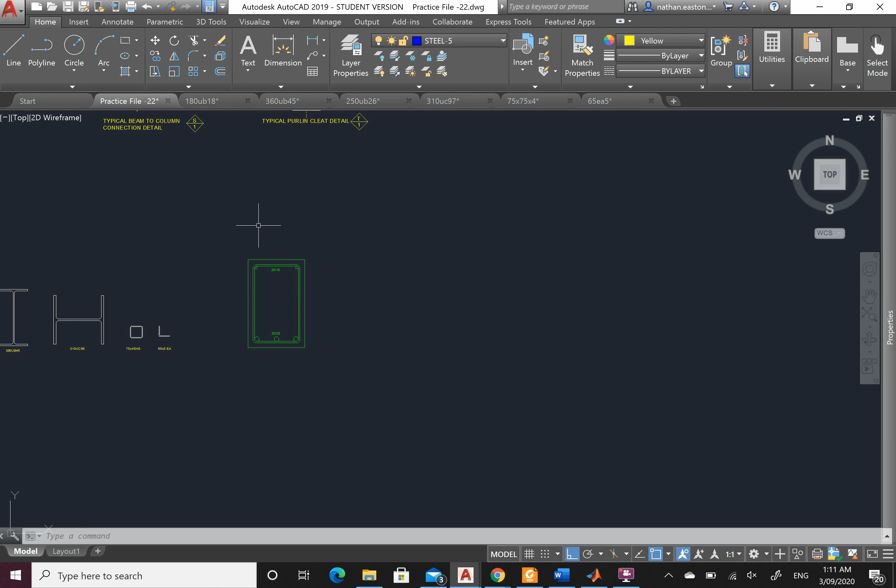So I've got this concrete beam. All I've done is taken off the measurements, and let's go through and draw it in. So let's change it to a layer of concrete. We've got concrete here, concrete 7, that will work.

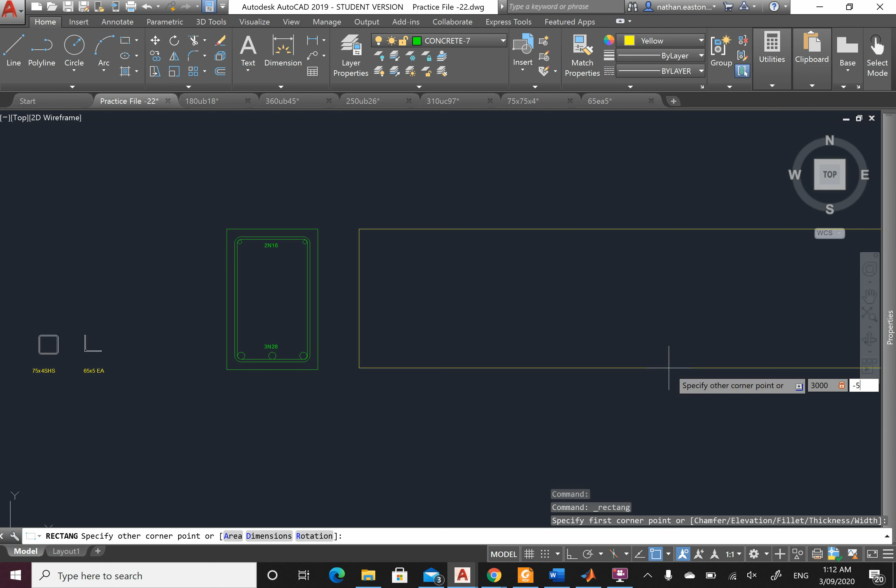So I know my beam, I'm going to say it's a 3 meter span, so 3000. And I know it's negative 550 deep. So negative to bring it down from the top, because we're dealing with X and Y coordinates. So what have I got? Well, I've got a 30 millimeter cover.

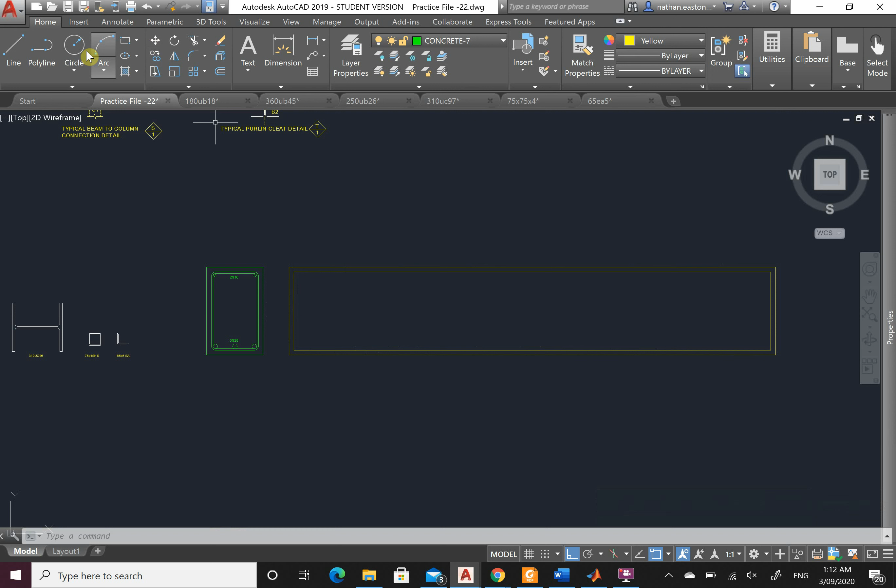So let's offset in by 30. Let's bring the beam inside. And these are my boundaries, basically. So really the outside is concrete, my steel is confined in between. So let's draw a line, one from here to here to start off with. Now this line, what have I got? Well, I've got the thickness of my ligature or my stirrup, and then I have 2 N16s up top.

So what we're drawing is how this beam looks from the side. Basically we're drawing in the steel cage that sits inside of it. It's the same principle for columns. So if I move this down by 10 millimeters, that's going to get me to the bottom of this ligature. If I move it down 26, I'm going to get down to the bottom of the bars, which is what I want. So let's move it down 26.

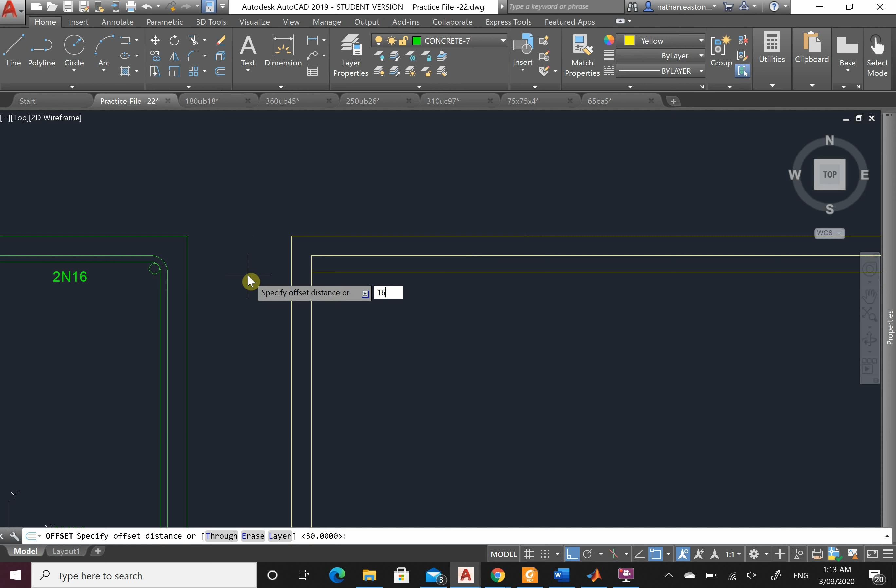And let's offset that back up by 16 for the diameter of the bars. So these lines through here are the bars, and our ligatures will run vertically up to this point. Looks like a lot of lines at the moment. It will make sense as we go. So same thing down the bottom, here to here.

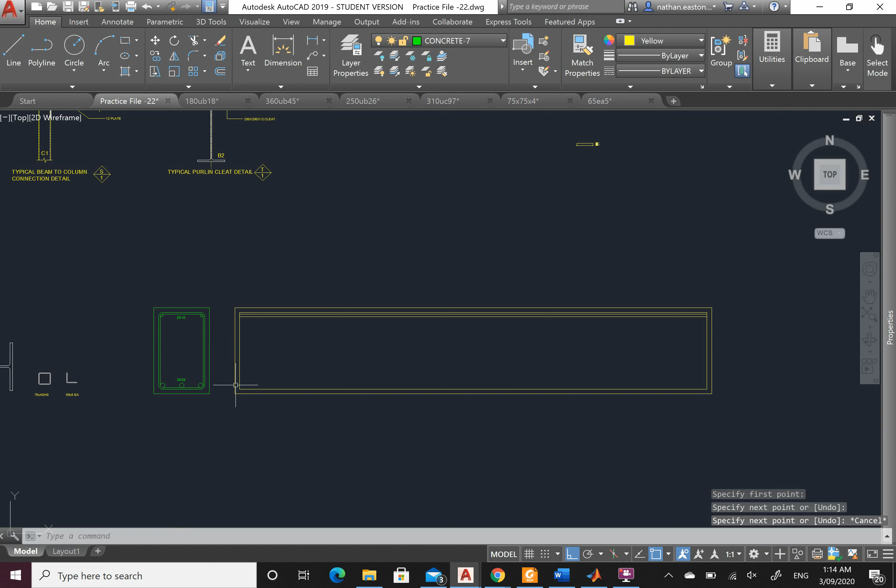Let's move this one up by 10. So moving up by 10 gets me to this line here. Now I have 28 to get me to the top of the bars. So let's copy this one up by 28 millimeters. And there we go. So what I'm going to do is I'm going to draw a line from here straight down. This is where our ligatures are going to start.

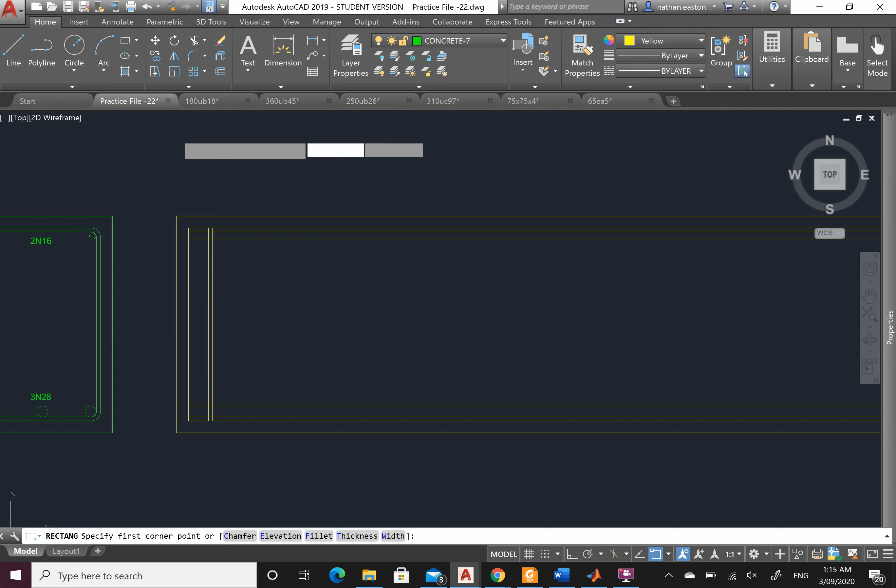Now they don't start at the end here. They start a little bit in. They might start 50 or 100 mil, probably not 100, maybe 75 mil in. So let's start this in by 50 to start off with, and I'll show you why at the end we might drag them all down a little bit. Offset by 10. So 10 mil is the thickness of the ligature. Now what I'm going to do is draw a rectangle around it, just to make my life easier when we go to hatch it.

So because I've now doubled up on lines, let's go through, select the ones. Remember, blue selects everything covered, green selects everything it touches. So everything in the blue, and we just delete that one, just so I'm not doubling up. Now I can delete this outside line. Don't need that anymore.

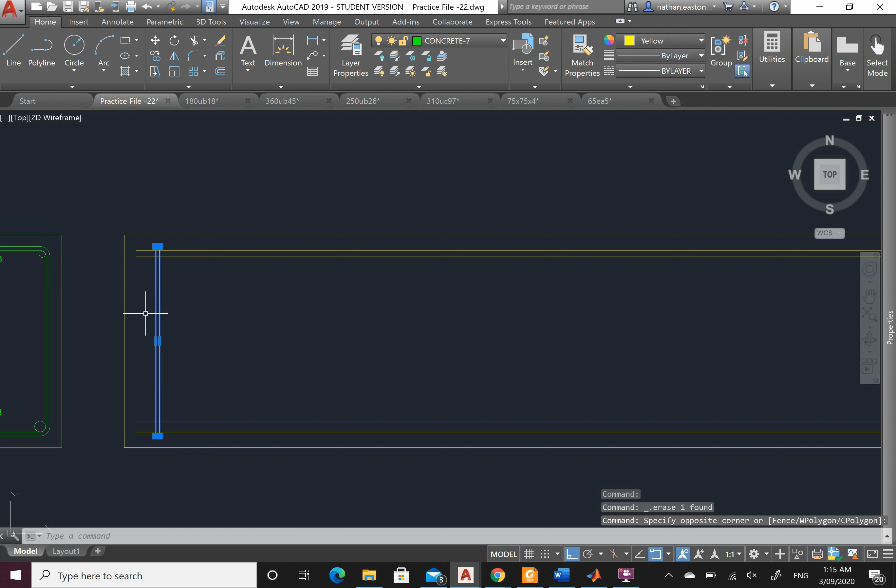Now these are going to be spaced at 300 centers. They might be more, they could be less. It's up to you as a designer. We design this for the shear capacity, so it all depends on the loads acting on the beams. So let's come through. We're going to space these, like I said, at 300.

So hopefully I can remember my times tables. Everybody sits there and laughs at me.

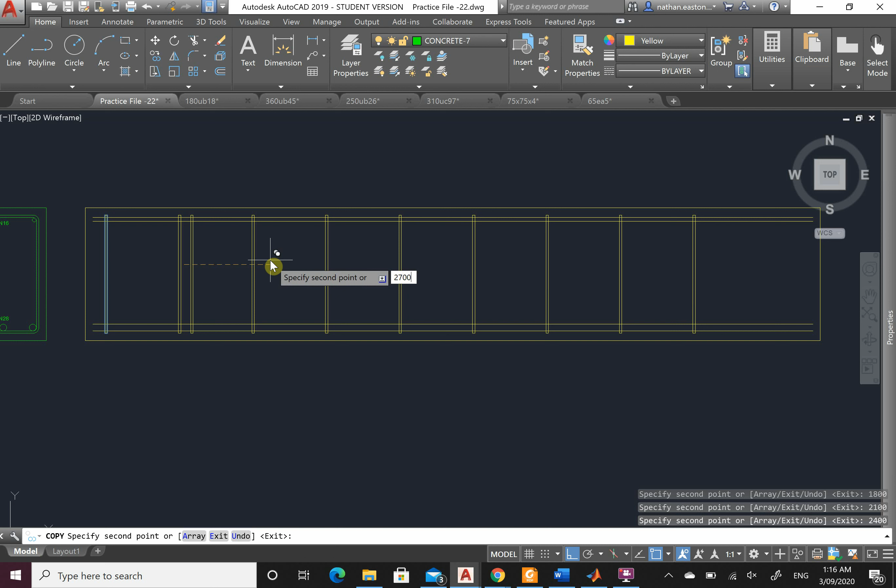So here we are, 1500, 1800, 2100, 2400, 2700, and 3 meters. Cool. So the one here at 3 meters is sitting way out of that beam, so I don't need that one. Delete. This gap here is probably a little bit too big. So what I might want to do is just select them all, and move them down by 75.

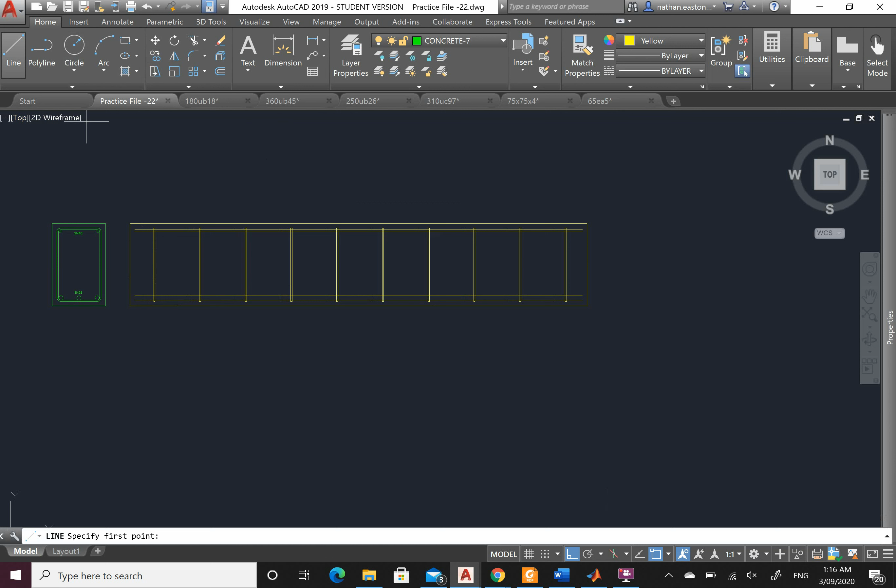So our spacings can be less than 300, they can't be greater. When you do your structural analysis, you'll read that in part of the concrete code, which says the spacing of these ligatures is a ratio. It's either 0.5 times the depth of the beam, 0.92 times the depth from the top to the center of the bars, or 300. So a lot of the time 300 is the governing factor. It's always the minimum of those three cases, but you'll learn that down the track. So for now, 300, and we're good to go.

Alright, so trim. Now if I look at this beam from the side, basically what I've got here is the cage. I can't see through its ligature, it's solid steel, it sits around the outside of it. So these ligatures, or stirrups, help for numerous things. What I'm doing now is just trimming through them, so I'll just talk while I trim, so everybody's not bored.

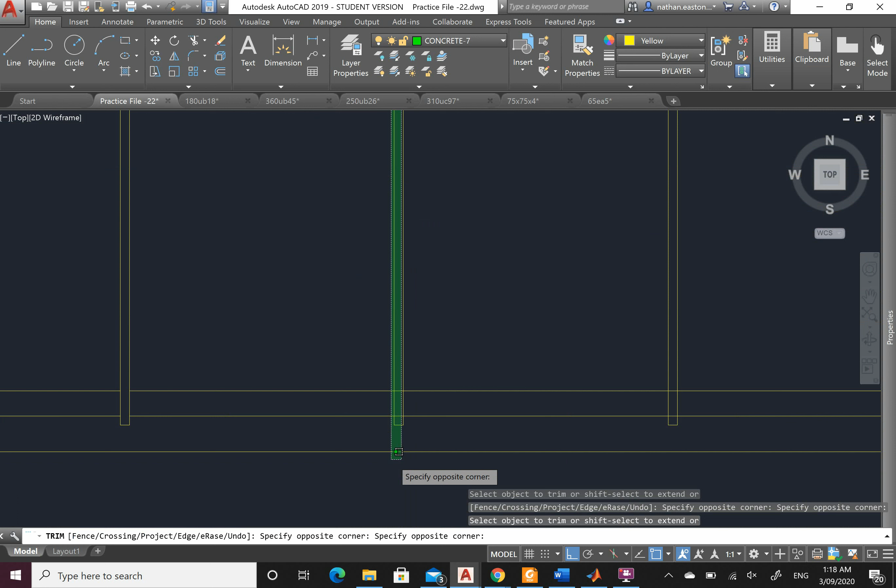What they do is they increase the shear capacity of our beam. On top of that, they also help to confine and hold our longitudinal reinforcement. This longitudinal reinforcement is quite slender, which means it's quite thin for how long it is. Because of that geometric property of the steel, we have to confine it somehow. So these ligatures effectively stop buckling occurring inside the concrete.

That's probably all absolute gibberish, but what it's doing is it's holding it in place, so when anything squishes against it, it stops it from doing this. So there's numerous different reasons why we put it in there, but they're the main ones. Awesome, so that's my little ramble. We finished trimming through these.

So what's next? Well, we've got our little, it kind of looks like a ladder. This is how our cage looks. If it was a column, basically you would just select it and rotate it up, and there's our concrete column. You have different ties, you'll tie them down in different ways, but it's the same principle.

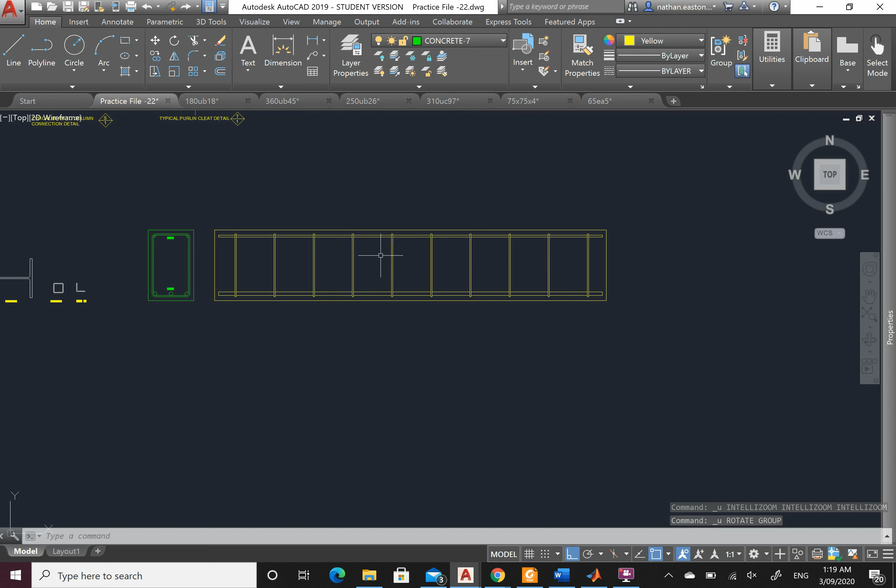So like I said, you'll need to know how to draw this for your analysis subject when you come to designing concrete. So let's come through and just do some hatching. We're not going to annotate it. I've shown you how to annotate the front of the beam. You'll learn down the track how to do this one, but it's exactly the same principles as everything else. So hatching with steel, selecting objects.

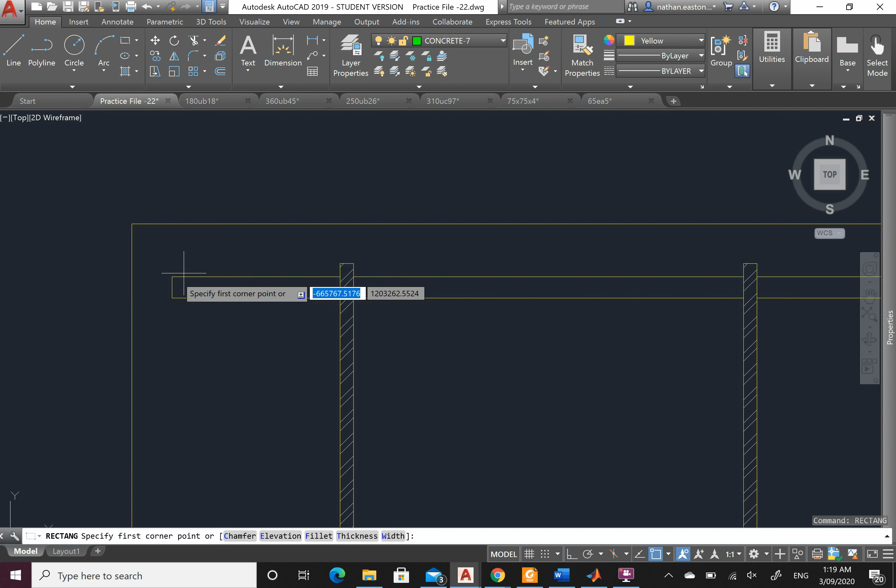Alright, I'm not going to select them one by one, that's going to be really annoying. So let's do this, enter. That works. And now, well, I'm not going to attempt to use the hatch by internal point. Just going to draw a couple of rectangles in here, and then I'm going to select them,

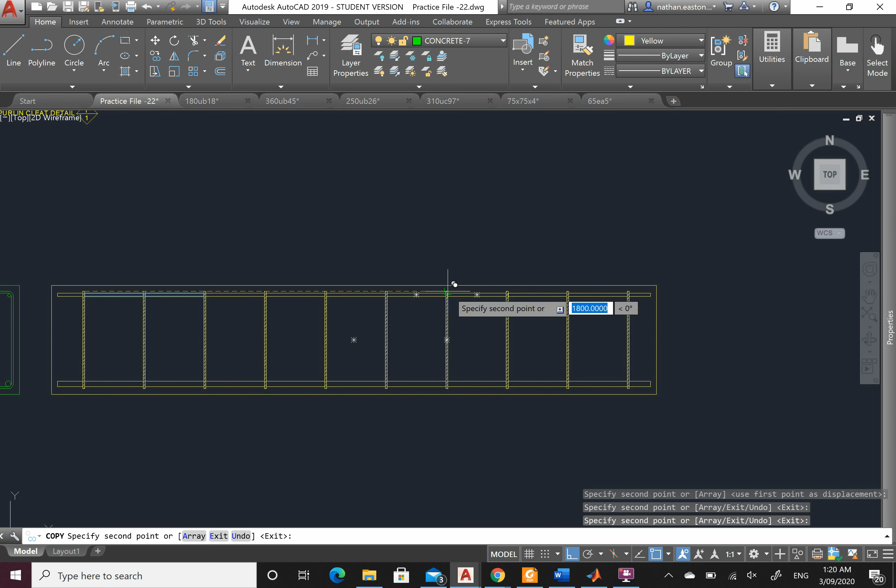copy. You can go through and delete the lines if you just double it up on, but I'm just going to be lazy because it's pretty early in the morning. So let's go through and just copy these down. So 1, 2, this one, 1, 2, this one, 1, 2, so I have one more here. And I can delete that, it's too much. Come through again here. I have to do the same down the bottom. I can't copy or mirror because this is a different thickness in the bar.

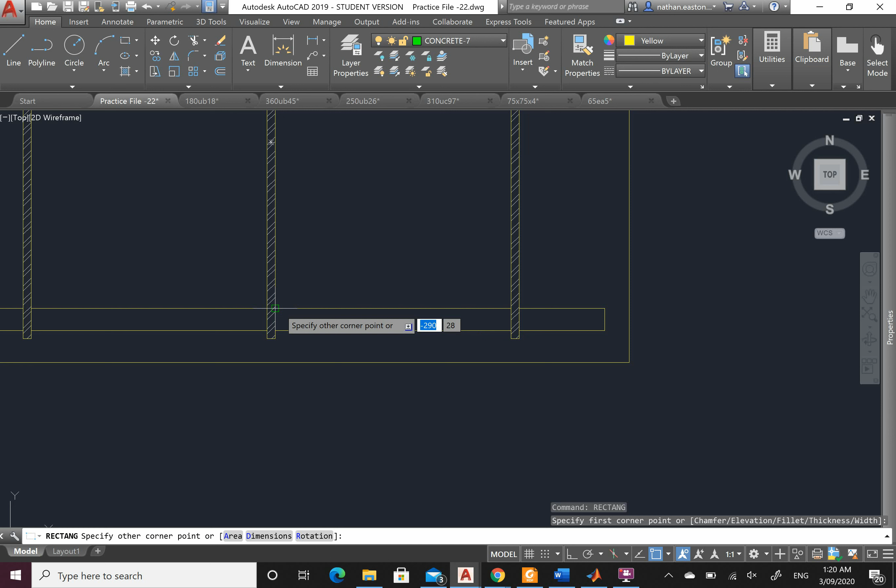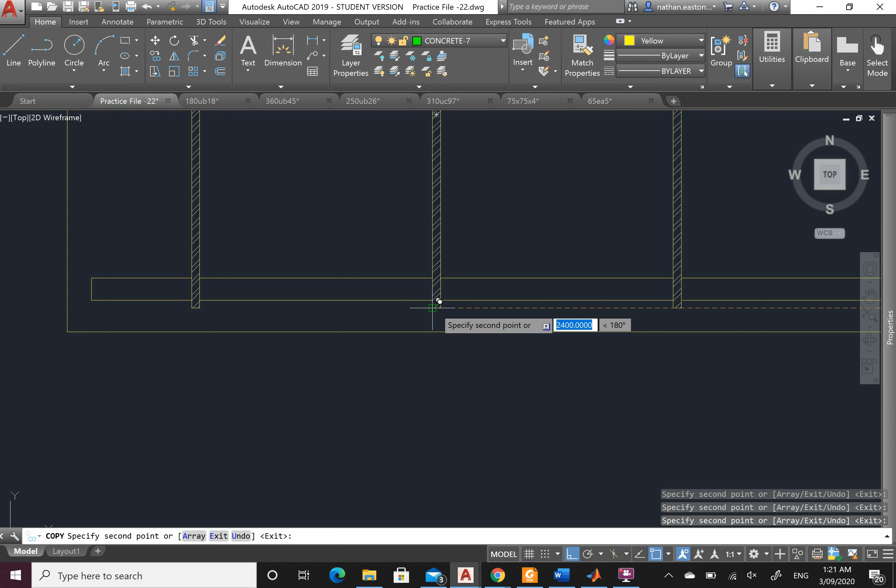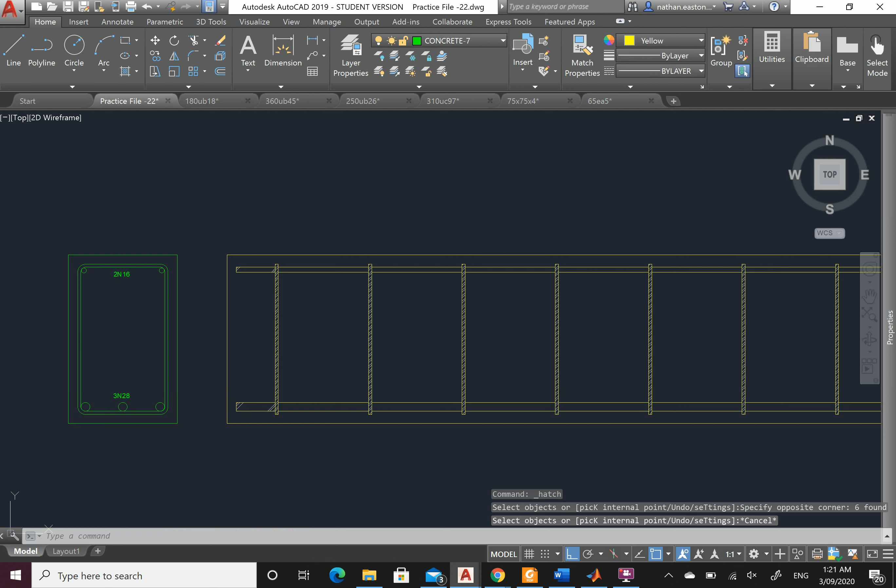Alright, let's just copy these down now. Cool, and let's go one more here. Alright, let's come through again. Let's do a bit of hatching. Oh, sorry, hatch. Select the objects you want to hatch. Well, oh, that's really nice. Control Z. Let's try that again. Alright, let's do them one by one.

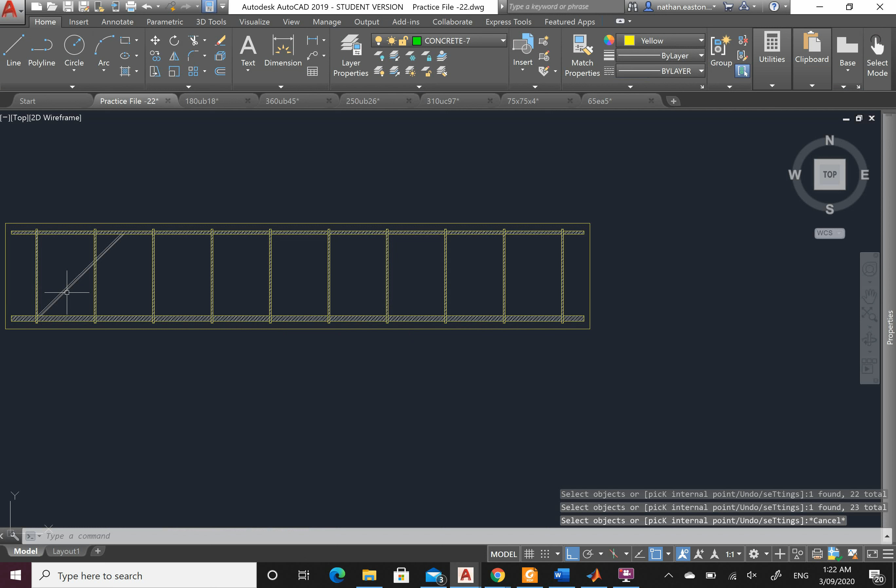So all I'm doing is just hatching in the steel components, and then we'll come through and we'll hatch in our concrete after. That's not very friendly. Control Z, it's going to let me do it all again. Sorry everybody. Let's do them one row at a time then, to hopefully prevent that occurring. So hatching is usually the most annoying part, or personally I find it the most annoying part of AutoCAD. Sometimes it's not the nicest to use. Let's come through and try it again.

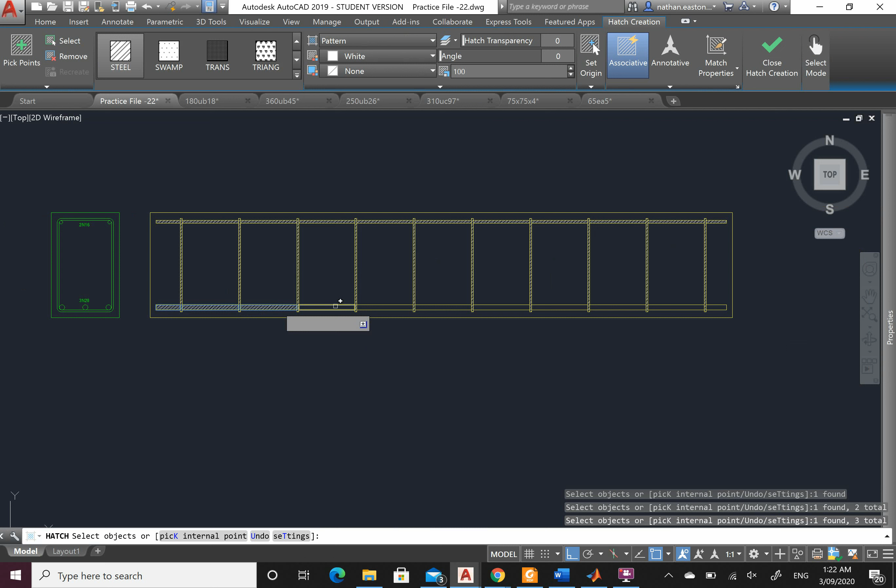What I might do is just click enter here, because all of these now is one hatch. And now we'll try it on the last one. That way if it stuffs up, I don't have to redo it. Moment of truth, beautiful. So that's our steel all done. Let's go through now and let's hatch in our concrete. So hatch. Well, we do have concrete in here somewhere. So it's AR-CONC. This is going to be, let's try 15, see how that looks. Pick an object, enter.

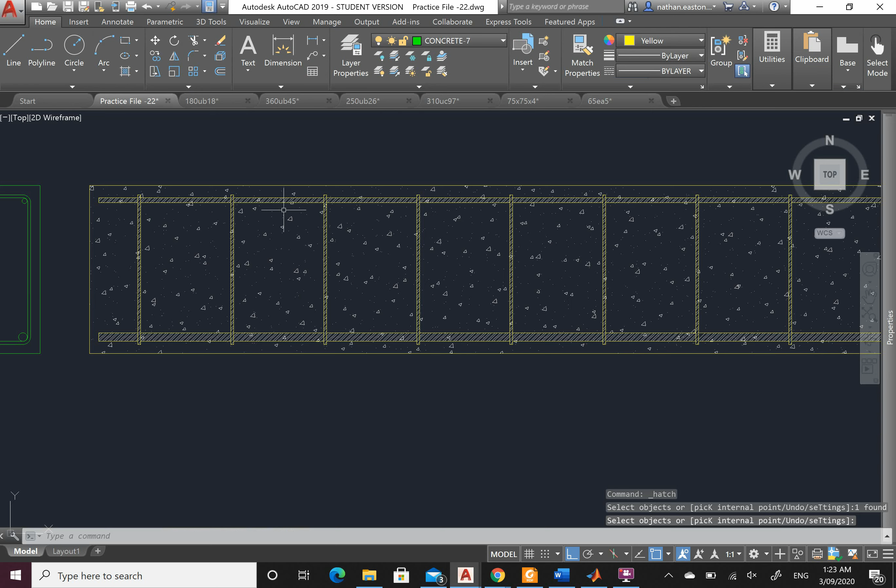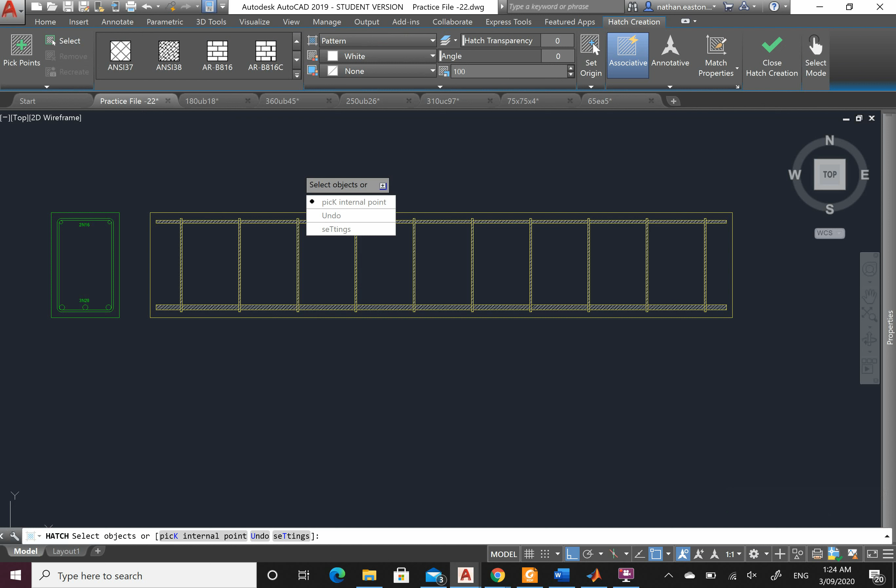Now what you find here is, well, it's flowing into my steel, which I don't really want. So let's undo that. Now what's the easiest way to do this, as opposed to drawing polylines and everything else, which we might have to do, but let's go hatch, come back up, let's click down the arrow, internal point, we'll try to come from here, which is the most annoying way to do it, but let's try it anyway. Concrete 15, enter, click once, click twice, 3 times, still working for us, that's good. It's also very nice. Enter.

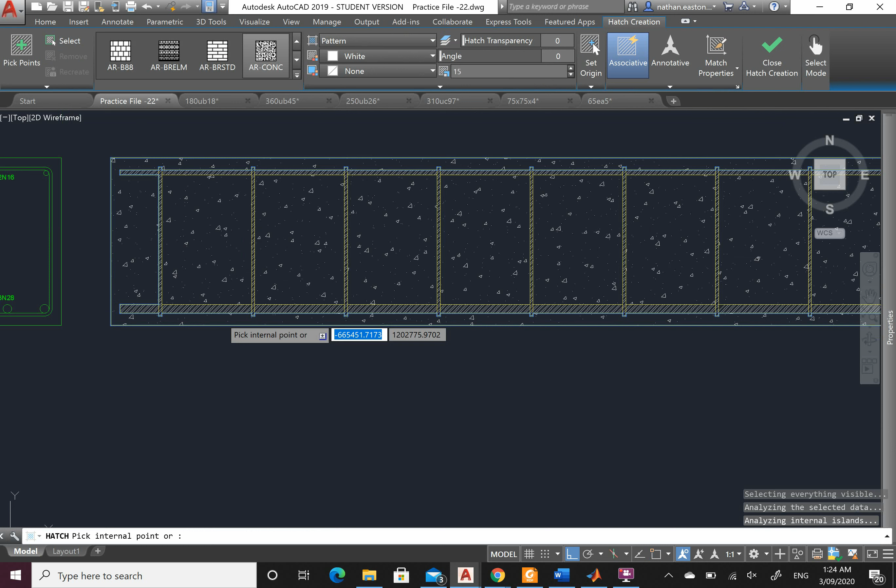Let's try again for the outside. Let's try down here first. There we go. Enter. So that's worked, and there's no crossing over at all.

I know what you're thinking. This is very much so like those little pictures that you get, you know, a blank picture on a white bit of paper where you color in to the exact edges. Kind of reminds me of that.

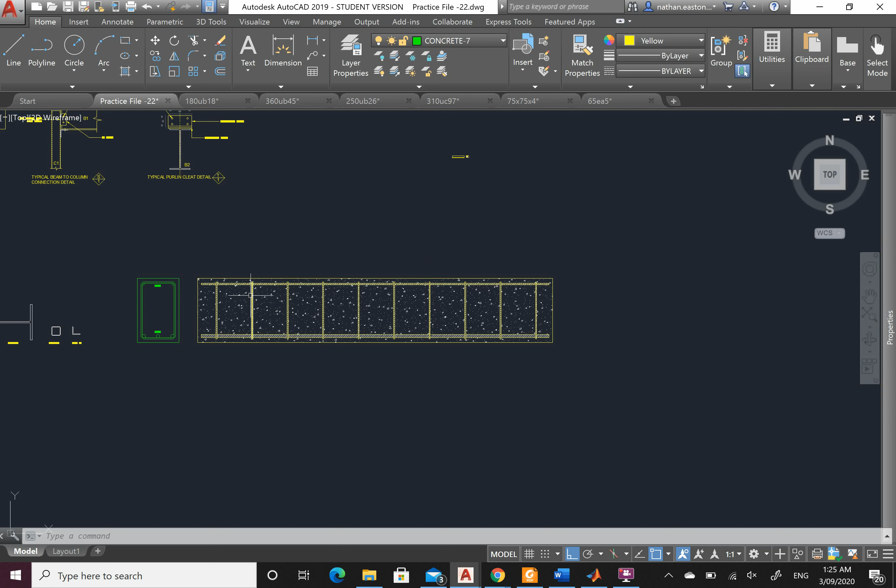Anyway, this is how we do our reinforced concrete beams. This is the side view of it. Alright, completely hatched. So from here you can come through and do your annotations. So usually you would annotate this, and this would be your section from there. In this section you would then detail more of the spacings, any kind of lappings. So what I mean by that is, if this was continuous to another bit of concrete, I would have more bars coming up at an 800mm lap length.

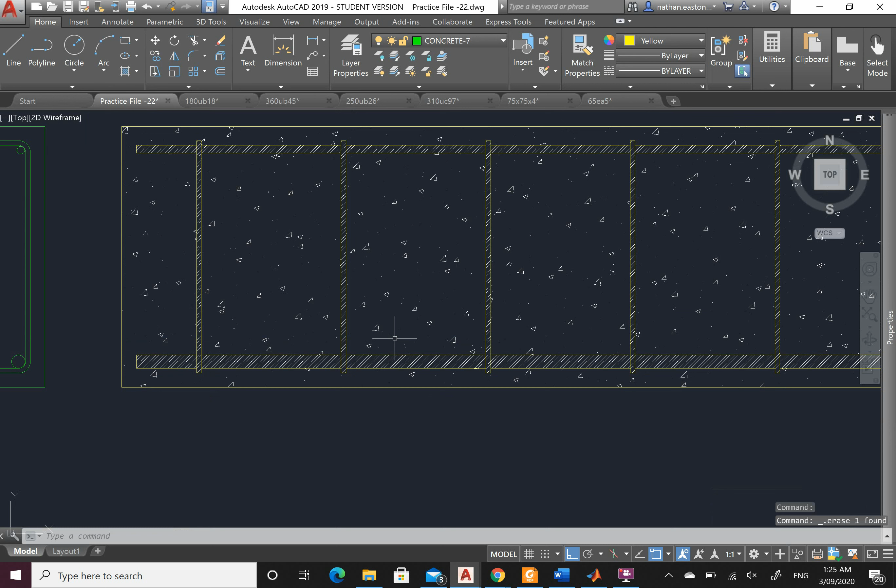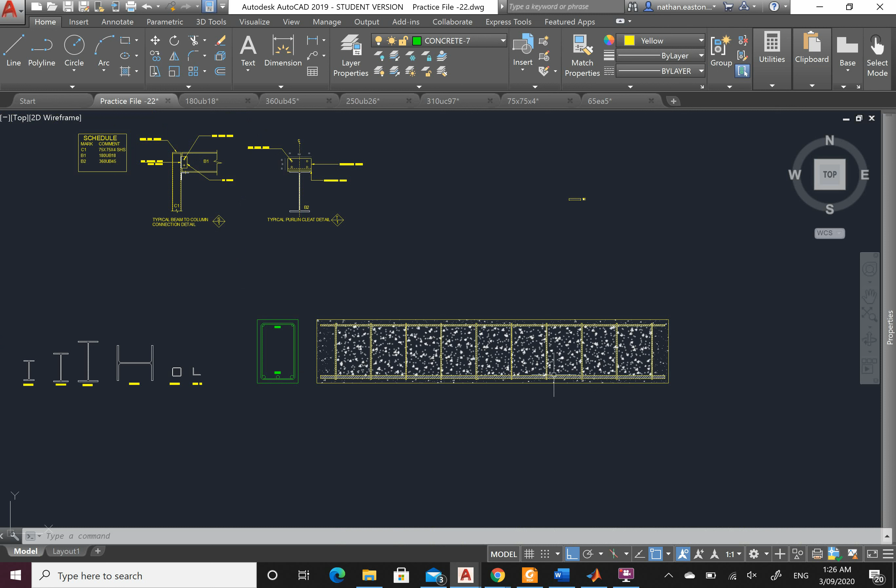We'll go through this on Thursday when I see everybody, but effectively you have steel coming up and tying together as well. Those things here is what you would detail more so on a cross section like this, as well as any positive and negative reinforcement you have. Same principle for continuous beams or for single beams or for doubly reinforced beams, exactly the same way, and this is how you do it. So please make sure you understand how to do these drawings, and I'll see you all on Thursday with a lot more drawings to go through.